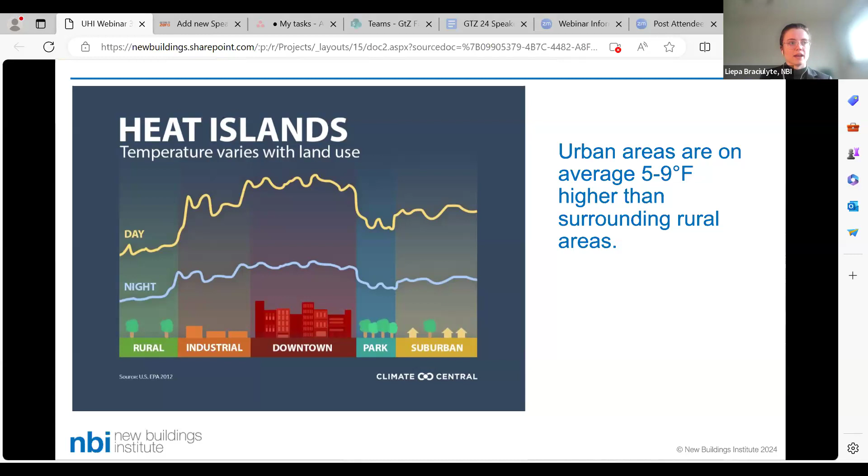As you may have heard from news coverage, 2023 was the hottest year on record, and 2024 is expected to surpass it. Heat brings along an increased risk of heat illness and heat stroke, and can even be fatal if adequate measures are not taken quickly.

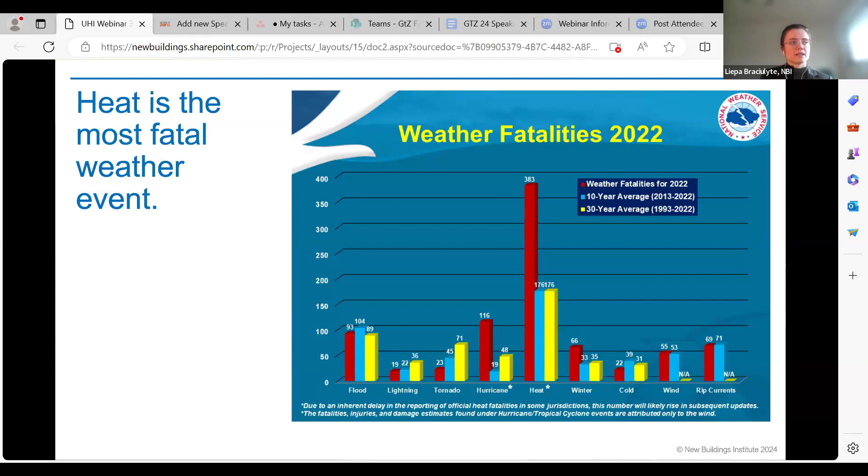In addition to causing heat illnesses, heat has many other impacts to health. For example, many common medications, such as for blood pressure and diabetes, reduce the body's ability to cool off. On the other hand, some medications are less effective at high temperatures. Also, high heat can increase mental health problems such as depression and anxiety, can reduce concentration, and has the potential to increase violence.

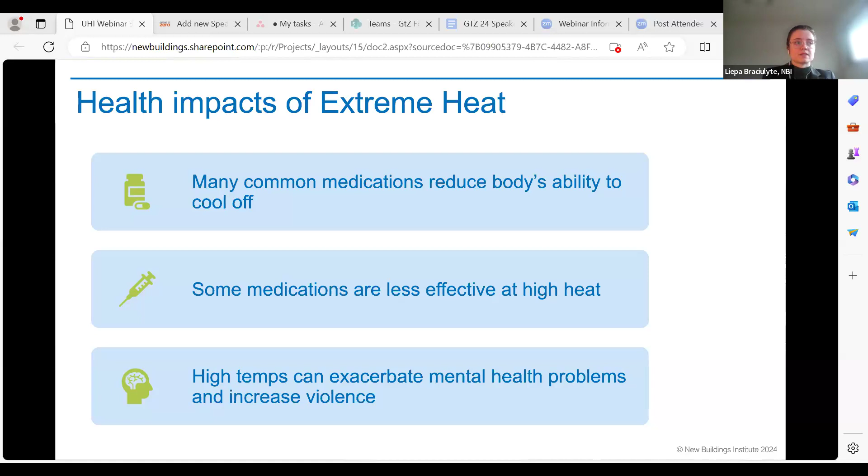Urban heat islands and extreme heat have many other wide-reaching impacts on communities outside of health. High temperatures increase the production of smog and air pollution. Extreme heat also increases energy consumption of cooling, increasing greenhouse gas emissions and utility bills for residents. Also, extremely high temperatures increase the wear and tear of buildings and pavements due to more extreme temperature fluctuation.

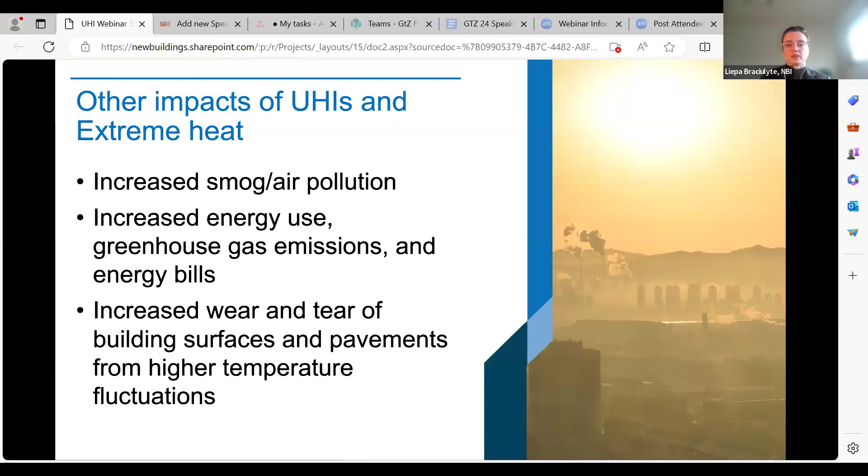In this webinar, we will discuss the following extreme heat and UHI mitigation strategies. These include cool roofs and green roofs, cool walls, cool and permeable pavements, shading, trees and vegetation, and a maximum indoor temperature set point, which is basically mandatory cooling. It's important to note that UHI and extreme heat mitigation are both climate adaptation and climate mitigation strategies, since they protect people from extreme heat while reducing the amount of heat being trapped in the atmosphere that exacerbates global warming.

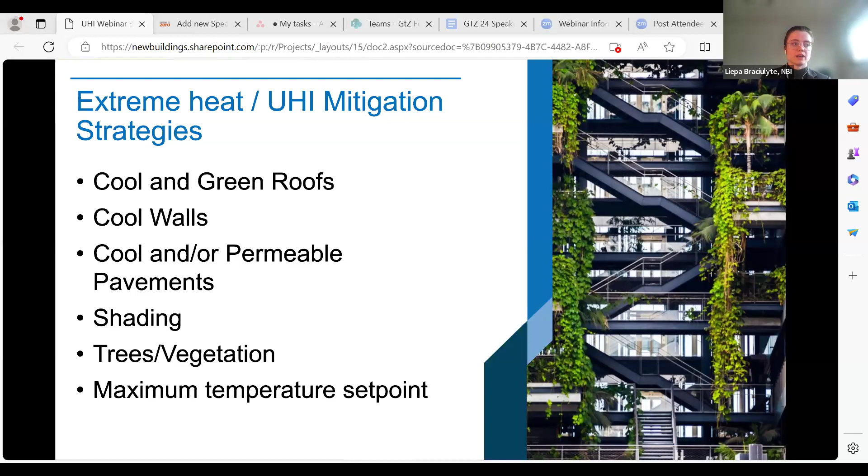Thanks, Liepa. Hi everyone, I'm Audrey. I'm the project manager with the Cool Roof Rating Council. Like Liepa said, I'm going to give an introduction about what cool roofs and cool exterior walls are, how they can help mitigate urban heat, and talk a little bit about the testing and evaluation, as well as availability of data related to these types of products.

So what exactly is a cool roof or a cool exterior wall? These are building exterior surfaces that highly reflect sunlight and emit absorbed heat. We measure how cool a surface is using two different radiative properties. The first of these is solar reflectance, or SR. Solar reflectance is the fraction of solar energy that is reflected by a surface, and thermal emittance is the relative ability of a material to re-radiate heat that is absorbed. Both of these properties are measured on a scale from 0 to 1, where 1 is 100% reflective or 100% emissive.

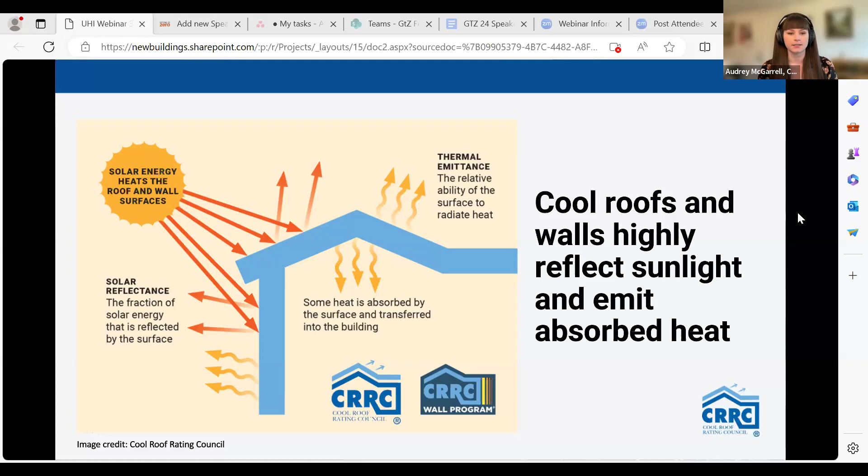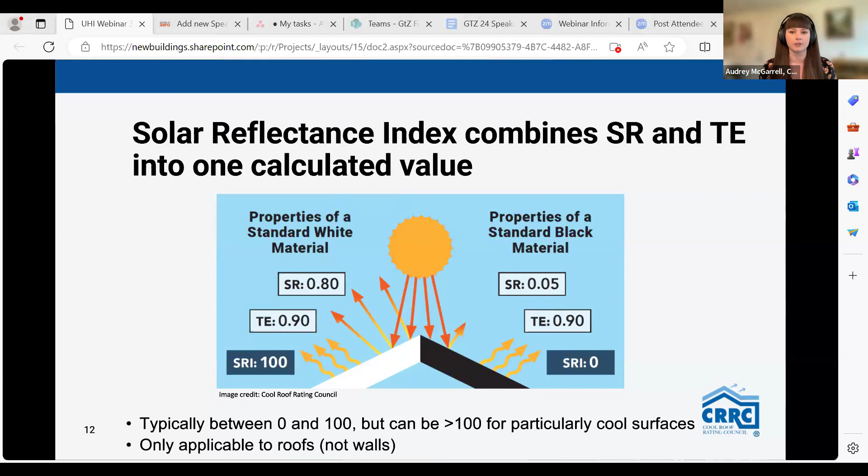Another term you may have heard of in relation to cool roofs is solar reflectance index, or SRI. This is actually a calculated value that combines the two measured properties of solar reflectance and thermal emittance into one number, typically on a scale from 0 to 100. 100 would be a cooler product. In some cases, you can actually have an SRI that exceeds 100 — that would generally be if the product has an exceptionally high solar reflectance. I do want to point out that SRI is commonly used for roofing materials, but it is not applicable for exterior wall materials. This is due to nuances with how SRI values are calculated and certain assumptions that go into that calculation.

So moving on to the impacts of cool roofs and cool exterior walls. I have this divided up by individual building impacts, and then we'll talk about impacts on entire communities, and finally looking at it from a global lens.

First of all, cool roofs and walls reduce the surface temperature of buildings and the resulting solar heat gain of the building. This can help reduce the cooling load of buildings that are air conditioned during hot weather, which in turn helps to decrease AC use and lower utility bills, and can also extend the life of HVAC equipment if it's being used less. In buildings that don't have air conditioning or have poor insulation, cool roofs and walls can also help increase occupant comfort and safety.

Like Liepa was talking about, heat can have very difficult impacts on people's health. And so in situations where AC isn't available, also like a power outage, cool roofs and walls can make a big difference. I do want to note that all of these impacts can vary depending on a lot of different characteristics of the building. Obviously, things like climate zone, time of year, energy use patterns, even how the materials are installed, can have an impact on the sort of magnitude of the impacts of cool roofs and walls.

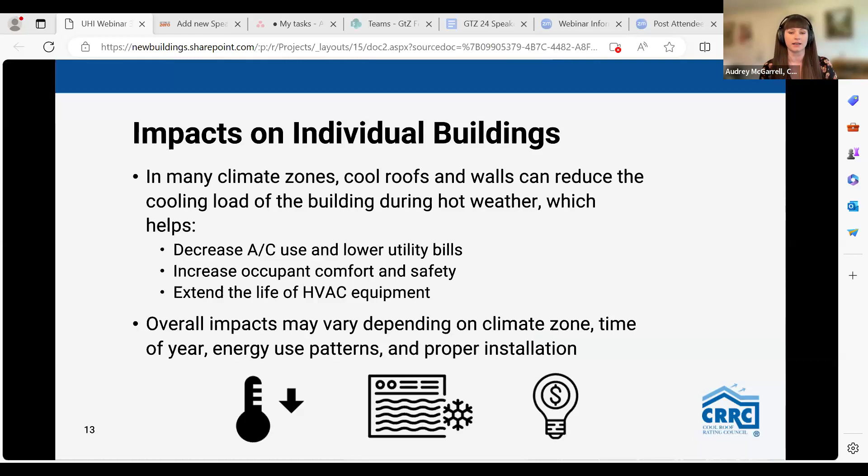Looking at the community level, the reductions in air conditioning use associated with cool roofs and walls can help improve grid stability, especially during peak times of day and peak seasons. It can also improve air quality by lowering outdoor temperatures, which can improve air circulation as well as decrease the production of ground level ozone. Reductions to the UHI effect and its associated public health risks from heat waves are also a benefit of cool exterior walls and cool roofs.

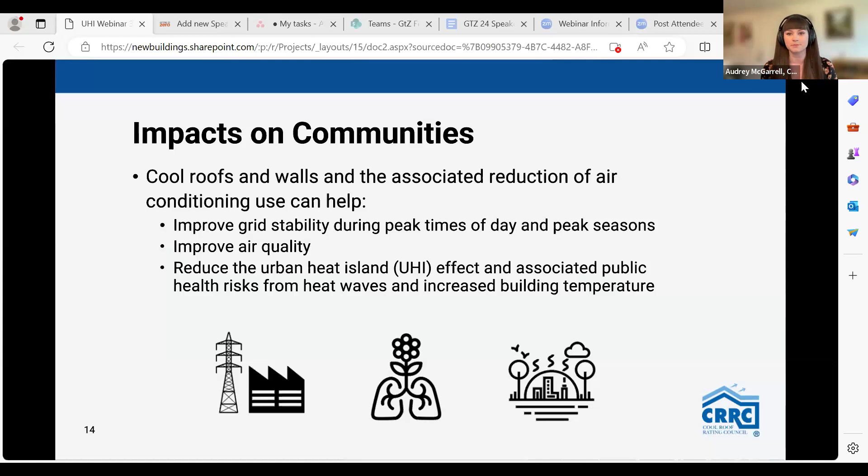Finally, looking at this from a global lens, installing cool roofs and cool exterior walls actually raises the global albedo, which can help reduce global warming. Furthermore, the reductions in AC use from using these surfaces can reduce the amount of CO2 and other greenhouse gas emissions associated with fossil fuel generated electricity for AC.

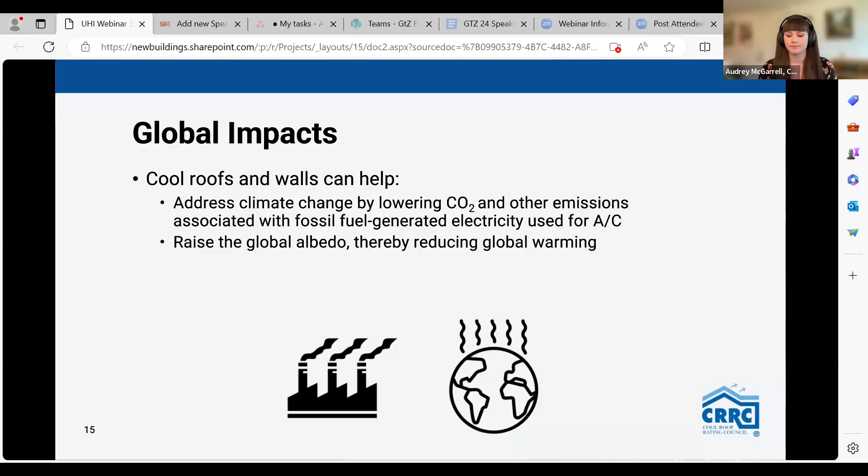Next slide. So now we're going to switch gears a little bit and talk about measuring and evaluating the radiative properties of exterior wall and roofing materials.

Both of these properties, solar reflectance and thermal emittance, can be measured in accordance with various ASTM standards and other industry vetted test methods at laboratories across the United States and abroad. The most common test method that's used for solar reflectance is ASTM C1549. This is obviously an ASTM standard that uses a portable solar reflectometer to perform measurements on specimens.

I do want to mention that while this test method is used for both roofing and wall products, there is a different setting that is required for wall products because of the nuances with how solar radiation is hitting vertical surfaces as compared to low and steep slope roofs.

I see a question in the chat. Please define ASTM. ASTM is a standards organization that develops and maintains standard test methods and specifications for different building products and all kinds of other products. So they're a global standards organization.

Moving on to thermal emittance, the most common test method that's used is referred to as the slide method. This is not an ASTM standard, but it's an industry vetted adaptation of ASTM standard C1371. This test method was developed in order to provide more accurate measurements of specimens that have low thermal conductivity. So basically, most roofing and exterior wall materials, aside from metal, tend to hold on to heat. They don't conduct it very well. And so that can affect the thermal emittance measurements. So this method is a way to get more accurate results for that type of material.

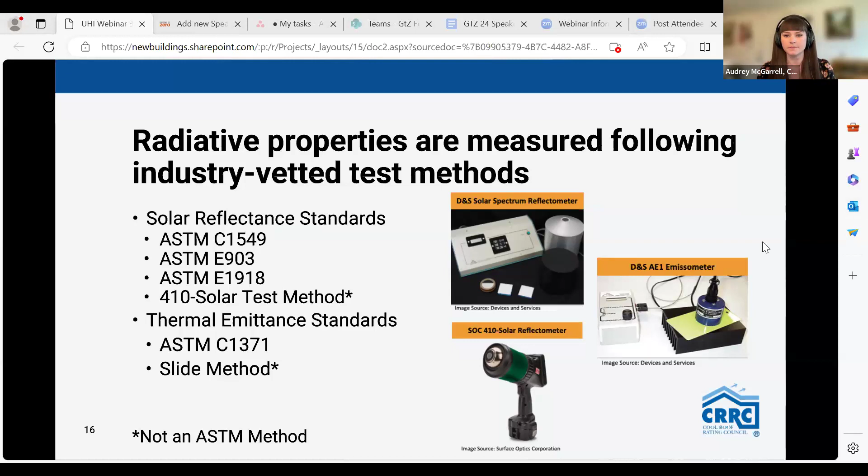Another really important part of evaluating a material's radiative properties is natural weathering. So the industry standard for natural weathering is 3 years, a period of 3 years of natural exposure. And for the CRRC's rating programs, which I'll discuss in a moment, we require specimens to be exposed in 3 different locations: Ohio, Arizona, and Florida.

Natural weathering and then following up with aged testing is a great way to sort of get an estimate of how a product will perform over time, since obviously once it's installed on a building, things like UV radiation, soiling, etc., will have an impact on the radiative properties. Next slide.

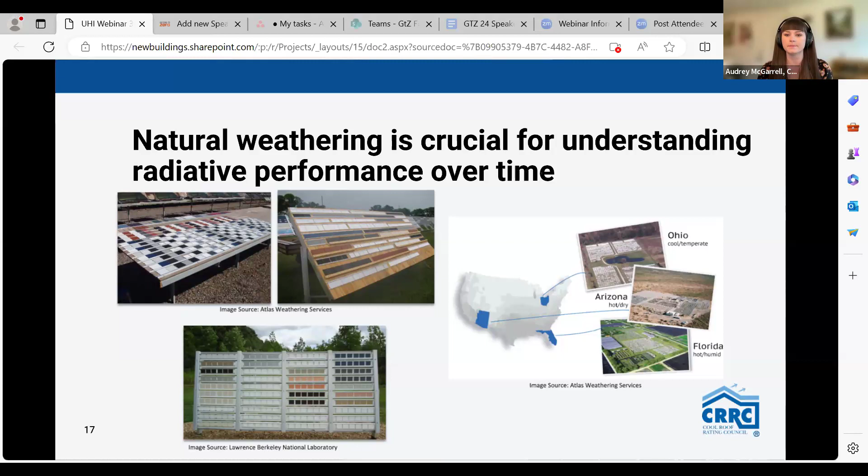Something else available for roofing products only is laboratory aging to provide simulated aged values. This is important because certain building codes require an aged solar reflectance value when installing a roof. So if a product has just recently been tested, this is a way to get that aged value and work towards code compliance without waiting for 3 years. When aged values become available, they replace the laboratory aged values.

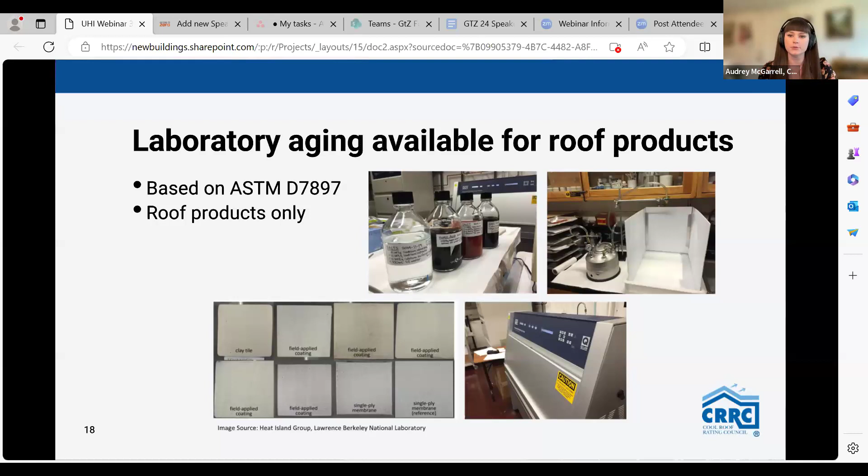One common question is whether cool roofs and walls are only white. While white roofs are one very common and easy way to achieve a high solar reflectance, they're not the only option. There are many roofing and exterior wall products available using materials that reflect infrared radiation while maintaining a darker visible color. A few common examples would be factory-coated metal roofs and siding, asphalt shingles made with infrared reflective granules, and a variety of paints and coatings for both roofs and walls that utilize this type of technology.

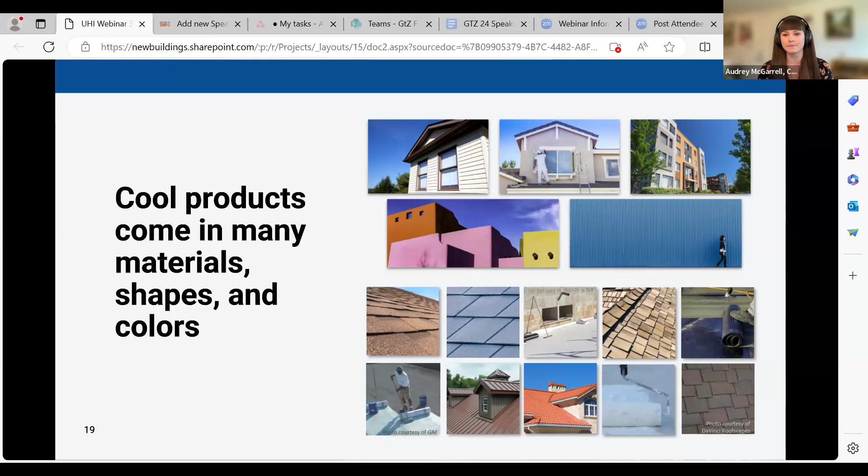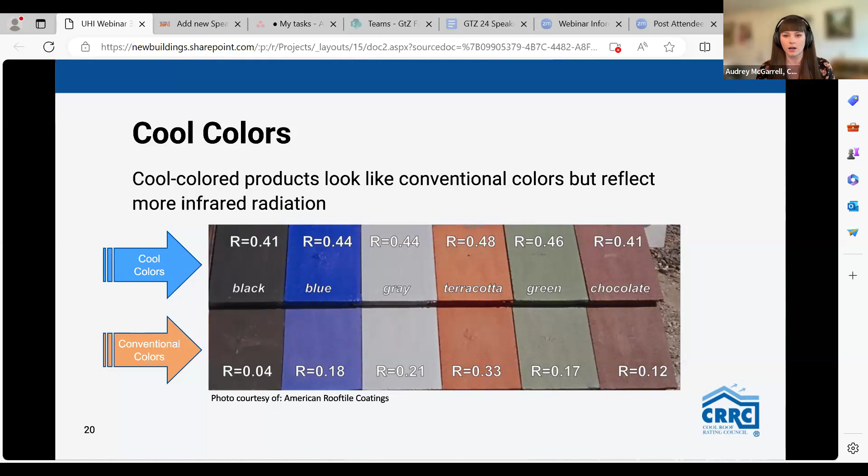Moving on, I want to briefly mention the existence of the CRRC's rated products directories. These are available online and offer free, publicly available roofing and exterior wall product solar reflectance and thermal emittance ratings. Our ratings include both the initial values, measured when the product is brand new, and the aged values, which occur after 3 years of weathering. The data are obtained following industry vetted test methods and by independent accredited laboratories.

This provides assurance that the data are credible, unbiased, and the specimens are managed under a strict chain of custody. All of this testing is done in accordance with our proprietary program manuals, and for our roof program, in accordance with the ANSI/CRRC S100 standard. That is an American national standard maintained by the CRRC, and it's actually referenced in a lot of codes, programs, and standards that promote the use of cool roofs.

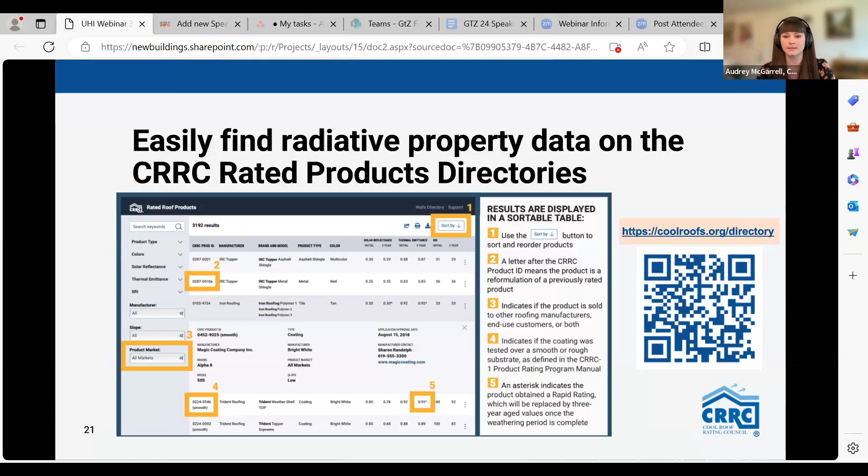So finally, to tie this into today's topic, third-party ratings have an important role in policy and program development, compliance, and enforcement. They provide assurance that data are accurate, and they help bolster claims made by manufacturers or people selling cool roofing and wall materials. They also help support the development of policies and programs by providing a repository of data to reference, to see if a policymaker evaluating policy options can find products out there on the market that can be used to comply. That does it for my portion, and I will turn it over to Chamonix to talk about installation.

Great. Are we ready to go? I think there was an attempt to change the slides.

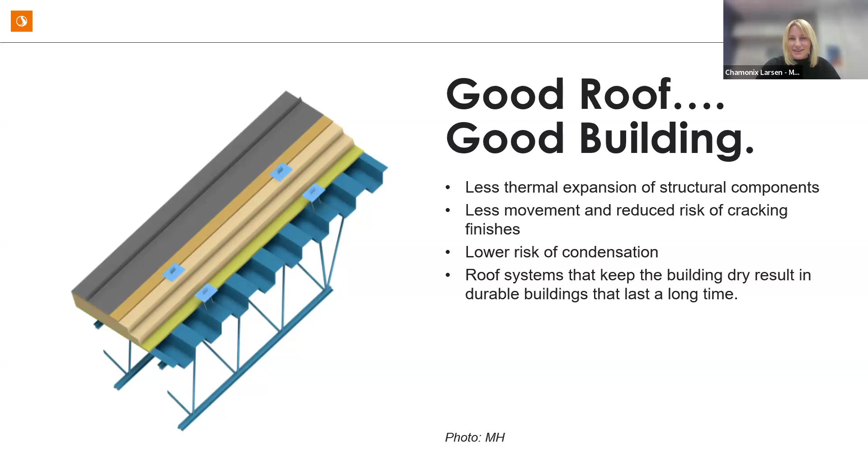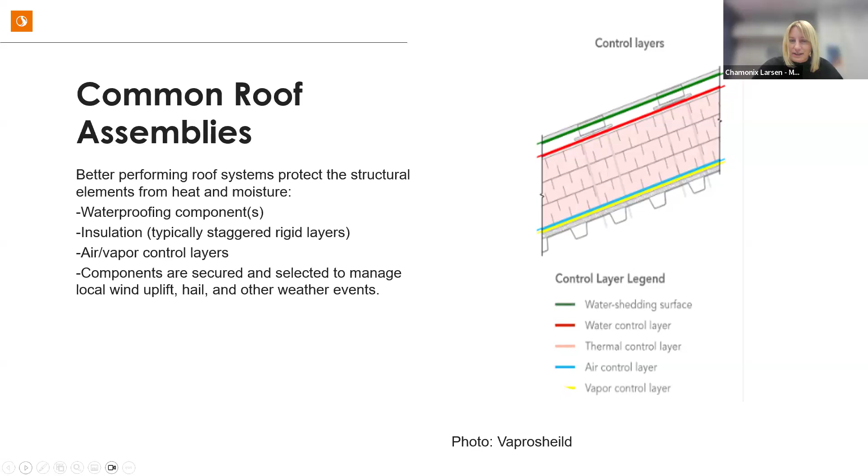Common roof assemblies vary, and in 10 minutes we can't really cover all of the types of roof assemblies on the market. There are probably thousands of different UL rated assemblies out there, and they all have different types of performance depending on where you're building. But a lot of them have the same basic components: a waterproofing component, an insulation component, some layer that controls air and vapor as well as water, and methods that they're secured in order to meet demands for wind uplift and other forces present in whatever climate you're working in. So the roof is a system, an assembly, not just one component, and it has a specific layering that helps it perform when put together properly.

So best practices for roofs in general are to slope them—let's get the water off the roof. One of the primary functions of a roof is to keep moisture, rain, snow, and ice from entering the building. They're often multi-layered for added durability. You see a lot of built-up roofs where you're adding layers together to create waterproofing and those performance aspects.

They can also be protected roof membranes, where the actual performance layer is located below things like solar panels or pavers. These need to be designed to reduce wear and tear. So if you're going to add a solar array or some kind of planted medium on top of an existing or new roof, you want to understand how those things will weather together, and make sure they're all designed to be together for a very long time.

We want roofs to last over 20 years. Typically that's a minimum amount of time you want a roof to last, but we often design roofs that last a lot longer, in place for up to 50 to 70 years sometimes. So the idea that they can be maintainable and durable over a long period of time is really important.

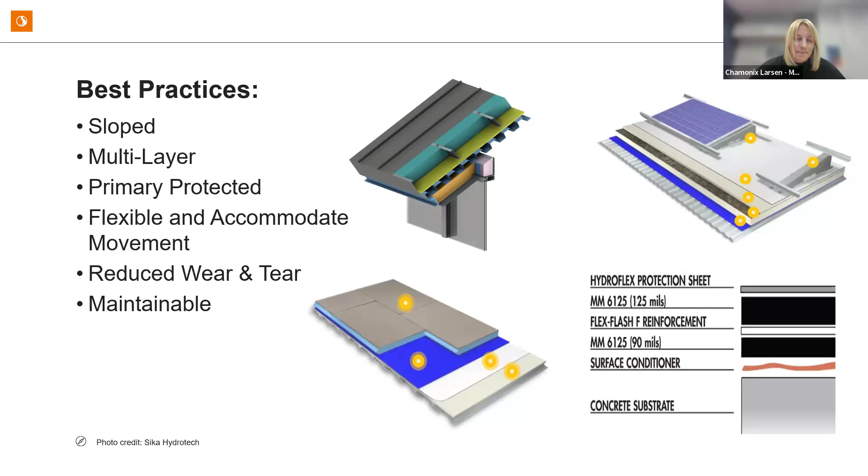Urban heat island and roof systems is again part of designing to achieve a solar reflective index, which is a code compliant requirement. The range is typically between 0 and 100 for most roof products on the market. It also applies to LEED sustainable sites, and relates to the membranes, metal components, finished materials, and rooftop amenities such as pavers and pools.

All those things factor into how your roof will actually perform when you think about its impact on urban heat island. There are also plants and planted roofs that help reduce your impact on urban heat island, and also help you meet code and develop methods for compliance. In the photo, you can see an ETFE roof—basically a pillow of membranes together that supports these big long spans.

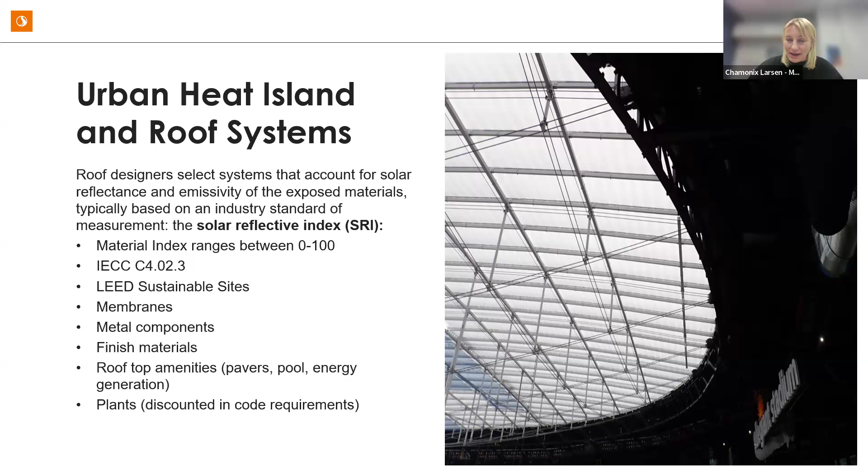Depending on your project, maybe you have a really traditional roof over something, or maybe you're trying to span a very big opening, like this stadium. You can achieve very lightweight, light colored roof membranes across multiple different types of membranes in your portfolio of buildings, and reduce your impact on urban heat island.

So roof selection and your solar reflective index should consider a couple of different things. Obviously, emissivity and solar reflectance are important, but you also want to know how much your building is going to be exposed—are you in the shade or the sun? Are you on a mountain slope facing north where you won't get a lot of sun? And what is the climate you're working in? All those things start to impact what kind of roof system you actually need to perform.

Those climates have a lot to do with whether you're in a heating dominated climate or a cooling dominated climate, and how much you're trying to mitigate the urban heat island that's possible on your site.

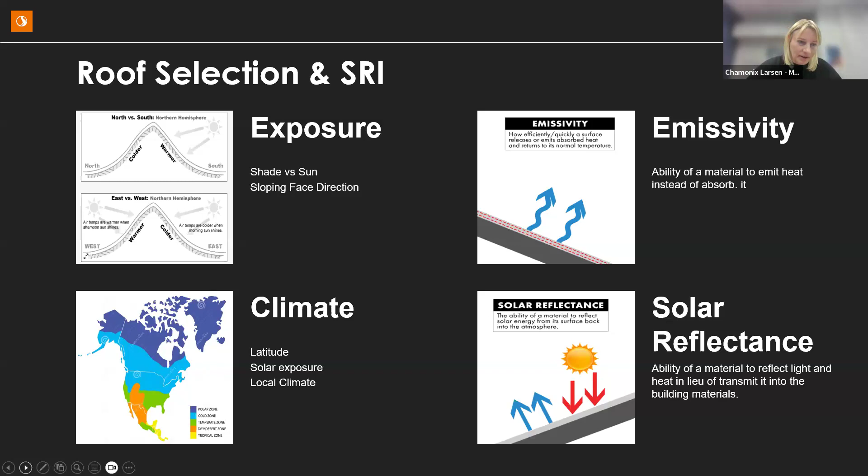So cool roof design approaches. One is obviously to select a product that has that reflectivity that mitigates it. Another one might be a planted roof or some kind of protected membrane roof. Those are two of the most common strategies.

A high SRI material may not always be required by code, so it's worth understanding when it's required and why it might be required, so you can design appropriately.

A shaded roof area, say you have a roof that's never going to be in the sun at those times, you might consider, is that the appropriate solution to my design problem? Am I going to put it below photovoltaics or some kind of thermal hot water system? Is it a greenhouse and I need to grow food? Obviously, a greenhouse isn't going to have a higher SRI material potentially.

Or is it a cold climate? And I put a question mark there because sometimes in cold climates you still want a high SRI material. But if you're trying to heat a building, there may be some cases where a darker roof color can help warm that building. Those are usually pretty extremely cold climates where that may make sense. It still may have an impact on urban heat island, and you still may want to reduce that in general.

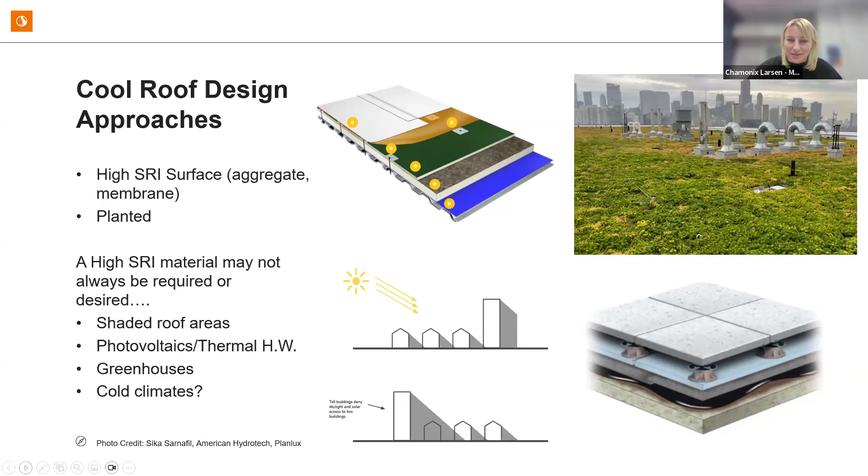Next slide. So roof color selection matters.

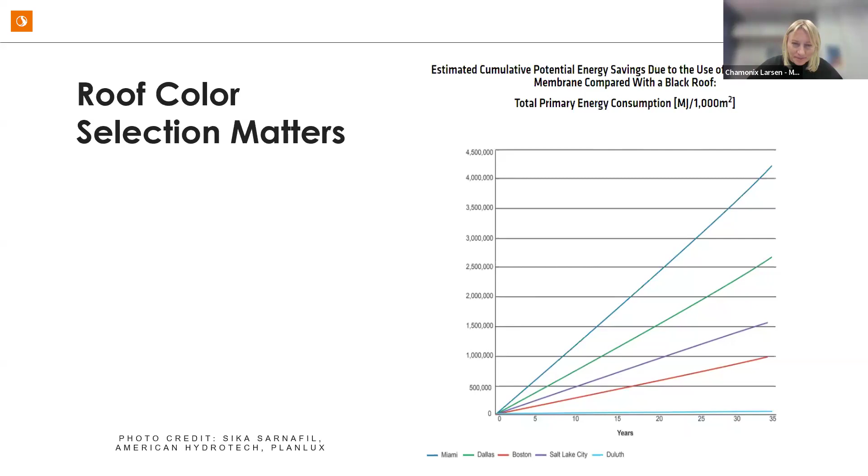So again, the SRI might be something that you pick based on the solar reflective index. It ranges between 0 and 100. It can be a membrane, and it can also be other components or finished materials. Rooftop amenities or plants may also be a part of that.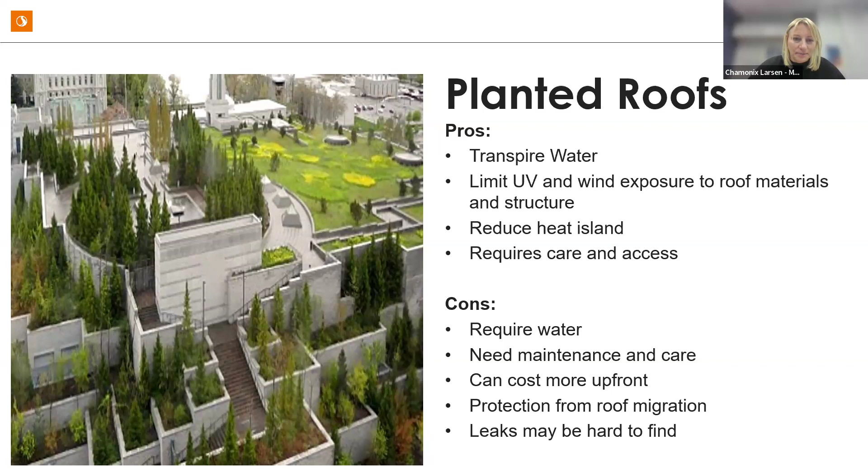The cons, you may be considering, is my climate appropriate for this? If you're in a desert climate, you're going to be adding water to your building, actually putting water on top of your building. These places need maintenance and care. They can also obviously cost more upfront. Your roof membrane needs to be protected. So if you have roots growing through your roof assembly, you need to make sure there is a root barrier, some kind of place where you limit the ability of the root to move through the building materials that you don't want it to move through. And then leaks may be hard to find. If you have a system like this, it's very much covered up. You may not be able to find some of those leaks after the fact if water's moving laterally in your roof assembly. Next slide.

Plant selection is also a really important part of a green roof. You want to make sure you understand the climate you're working in, in terms of hardiness zone, rainfall, and wind. You want to understand your site: how much sun and shade will it get, what kind of biodiversity do you want to create, what size of vegetation, and the visibility as well.

Maintenance is also a huge consideration with planted roofs. Do you want to do year-round maintenance? Do you want to allow whatever the wind brings to the roof to settle and grow there, or are you going to do a lot of weeding and care to try to maintain a certain set of vegetation that you're looking for?

Access is also important. If you have a roof that needs maintenance, you need to make sure access is safe and that there are options to access the roof. The picture in the lower corner is a roof deck with public access, which makes it easy, but not all roofs have that, so maintenance access needs to be considered as well.

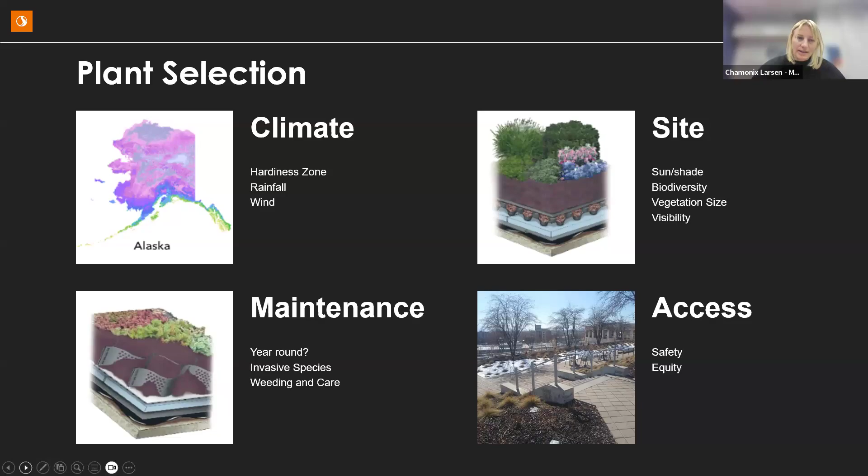Another part of roof assemblies is controlling things that impact the performance or quality of the building underneath, and air leakage is a big part of that. Most roof assemblies need some level of air control. When we don't control air, we get problems.

The picture on the left shows an air leakage test. We have ways to determine where air leakage is happening at roof assemblies and how much. The pictures on the right show what happens when we allow a lot of air to move through roof systems into a parapet condition in a colder climate, where humidity can land on surfaces and result in risk of condensation.

Controlling air and understanding how it moves through your roof is an important consideration for getting a high quality roof. This happens at all transitions of the building: parapets, penetrations, skylights, drains, any kind of connection point structurally, like for a solar array or a landscaping wall, has the potential to promote air leakage and these risks.

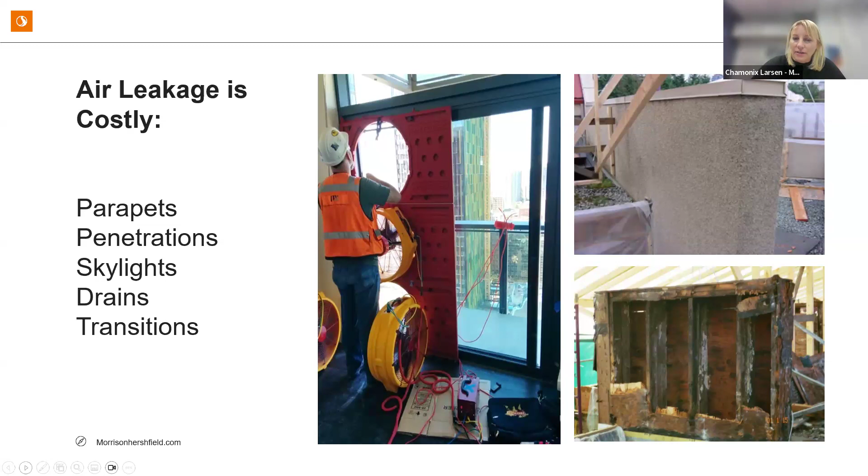Another point I want to make is that in design of roofs, we need to address thermal bridging. I'm just touching on this, but there are definitely ways we can design planted walls and green roof walls to have a significant impact on the energy use of the building if done properly.

The slides on the left show a roof assembly with a parapet wall that extends through the insulation layer, and the diagram below shows thermal imaging and modeling of that design approach. The images on the right show another solution where the insulation runs below that wall, and how much that mitigates the thermal heat flow through the assembly.

Some of the amenities and features that make us really like planted roofs and roof amenities can also have a significant impact on the energy use of the building, so designing to mitigate those impacts when significant is important.

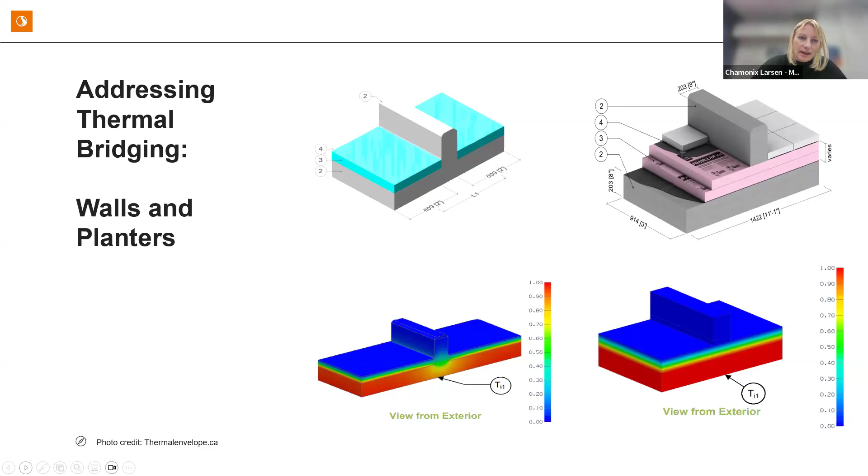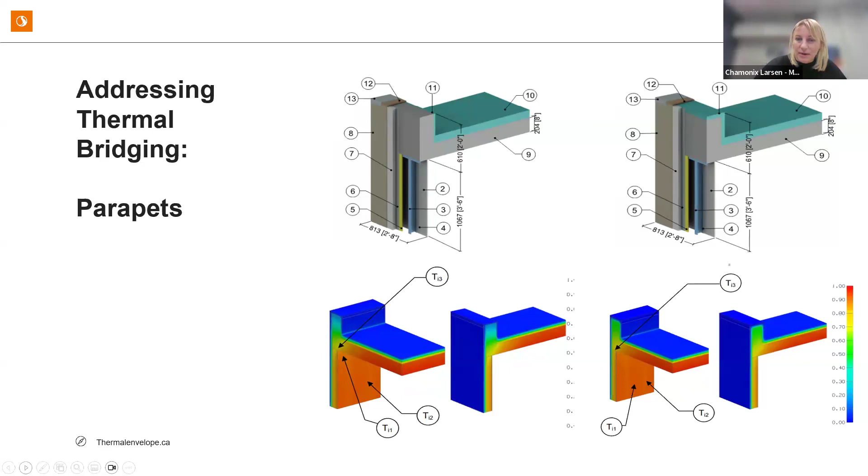Reiterating this a bit more, parapets also have this potential, and really any detail does, but you can see how an uninsulated parapet detail has the potential to move quite a bit of energy through it. Whereas if the insulation is brought up and over all these penetrations and is continuous, it can have a significant impact on keeping heat in and cold out, or vice versa depending on your climate, maintaining building comfort by looking at those roof details more closely.

That's it for my portion. Thank you.

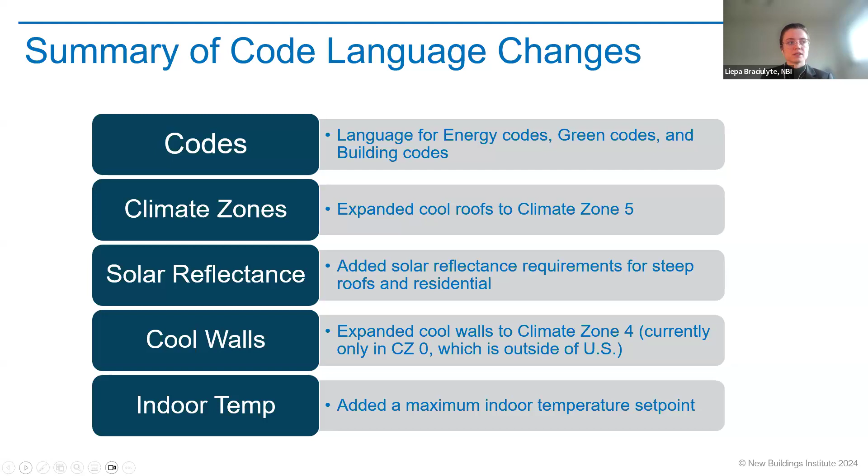Jurisdictions can modify this code overlay language in the report and use it for any other policies such as zoning code ordinances, incentive programs, housing codes, and so on.

The UHI and Extreme Heat Code Overlay report includes code language for 6 different codes and standards. The first type of code is the Energy Code, which includes ASHRAE 90.1 and the IECC, or International Energy Conservation Code. ASHRAE 90.1 is for commercial buildings and multifamily buildings 4 stories and taller, while the IECC includes requirements for both commercial and residential buildings. Both are energy codes, and their goal is to make buildings more efficient. In the code overlay report, we included language for both cool roofs and cool walls in the energy codes.

The second type of code included in the report is the Green Code, which is ASHRAE 189.1, also known as IGCC. The goal of this code is to reduce the environmental impact of buildings, and it includes requirements for cool roofs, cool walls, cool and permeable pavement, and tree shading requirements.

Lastly, the third type of code in the report are building codes, which aim to protect the safety and welfare of the building occupants and the public. Codes in this category include the International Building Code, International Residential Code, and the Mechanical Code. We included the cool roof and cool wall language in the IBC and IRC, and in all three codes we incorporated a maximum temperature set point.

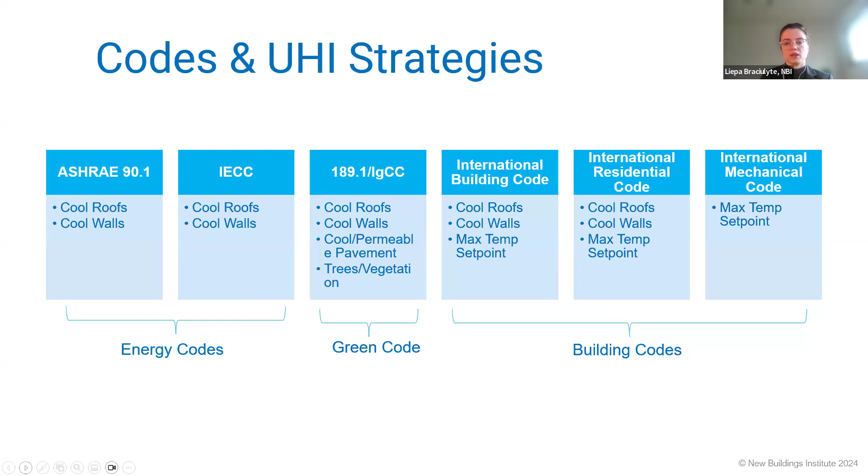We included all these code options because different jurisdictions have different priorities. Some really prioritize their energy code, while others work primarily from their building code or their green code.

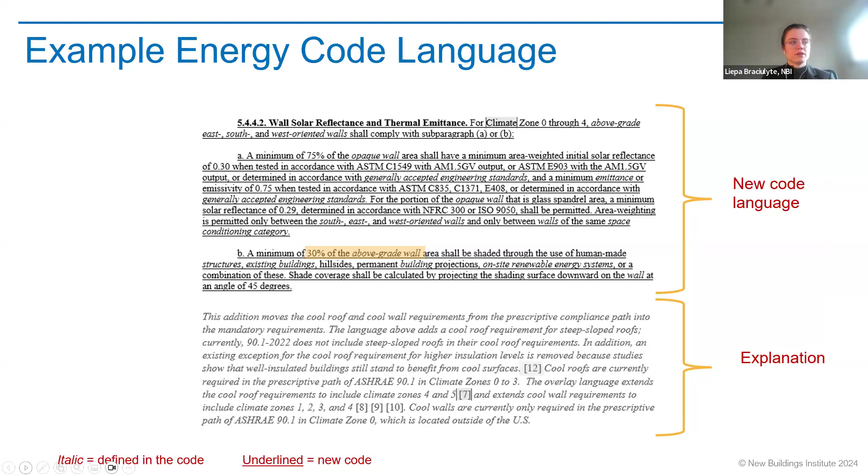The language in the code overlay can be modified to best suit a jurisdiction's goals and needs, and it can be used to create policies other than the energy code.

Before a local jurisdiction can decide which extreme heat or UHI mitigation strategy they will implement and the policy pathway they will take, jurisdictional staff need to verify the rights that the state has given to the jurisdictions and what they're allowed to legislate. For example, some states don't allow their cities to create local energy codes that are more stringent than the state code. In such situations, jurisdictions can implement policies via the zoning code or other strategies.

For example, suppose the jurisdiction does not have the power to require cool roofs and walls or any other mitigation strategy. In that case, they can create a performance approach for UHI mitigation that requires buildings to choose a combination of different strategies, but the jurisdiction is not requiring every building to have cool roofs, for example. They can choose whether they want to incorporate shading, trees, cool roofs, cool walls, cool pavement, but there's not one thing that each building needs to incorporate.

There are many different types of policy pathways that a jurisdiction can use to implement extreme heat mitigation, including zoning code, housing code, energy code, building code, incentive programs, and others.

Zoning codes implement the goals and objectives of a comprehensive plan of a city. They generally dictate function for an area, building height and bulk, population density, and parking requirements, as an example.

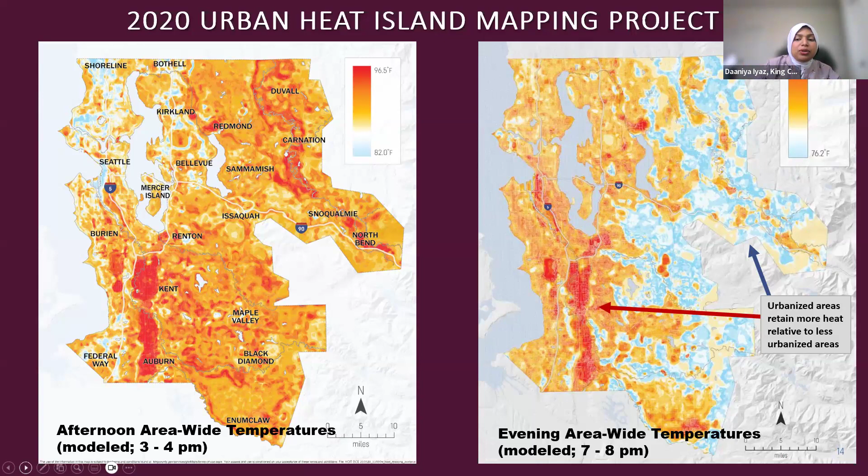Looking at this heat island effect, we're noticing that at the evening map, there really isn't as much nighttime reprieve from hot temperatures, which can be dangerous for health conditions. We're seeing up to a 20 degree difference between the surface temperatures in those really hot areas in South King County and the more rural, cooler areas.

One more thing to note is that these indoor temperatures can sometimes exceed the outdoor temperatures, and they're the ones that are most dangerous for health conditions.

We especially saw this during the 2021 Pacific Northwest heat dome, which I'm sure many of you heard about, where we saw over 30 deaths directly attributable to extreme heat in King County, which is extremely abnormal for our region.

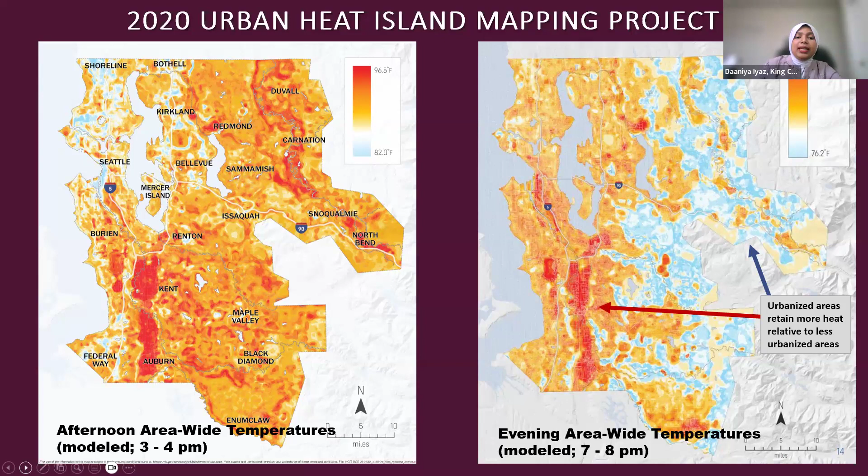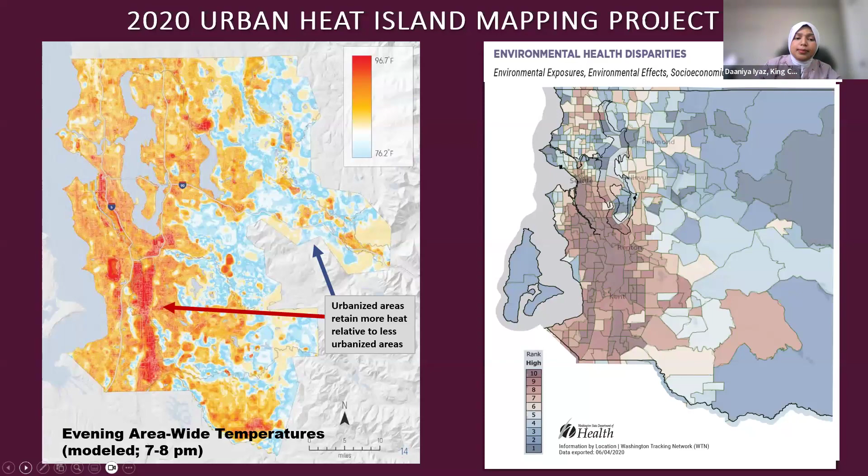So the people most impacted by extreme heat are some of the most sensitive and vulnerable to it. All of this, along with the 2021 heat dome, formed the impetus for why we wanted to create the first ever county-wide extreme heat mitigation strategy.

It's a priority action in King County's already existing strategic climate action plan, under climate preparedness and community health, and it's also supported by a FEMA grant as well as additional King County funding. But in terms of our audience, it's not just for King County government. We recognize that as a county of about 2.3 million people, we're a community of communities, each having their own needs, challenges, and burdens when it comes to extreme heat.

So we are co-developing the strategy with local jurisdiction staff, as well as community organizations and partners, to really come up with a portfolio of solutions for what we can collectively do to mitigate extreme heat.

We recognize that this is not really a one-size-fits-all situation. So the focus is going to be on a mixture of short-term actions that have to do with, for example, emergency management coordination, multilingual public health messaging, as well as really getting at some of the systemic factors that affect how people experience extreme heat, such as urban tree canopy management and building codes, and how we design neighborhoods and communities.

The completion date is summer 2024 — that's when we'll be releasing the strategy this year. Right now we're working on really ironing out and refining the actions and drafting them.

I wanted to quickly share our draft goal statement, just so you understand what our overall goal is with the strategy and what strategic priorities are driving our work. Our goal overall is to reduce the harmful impacts of extreme heat on people as well as the environment in King County, with three different strategic priorities.

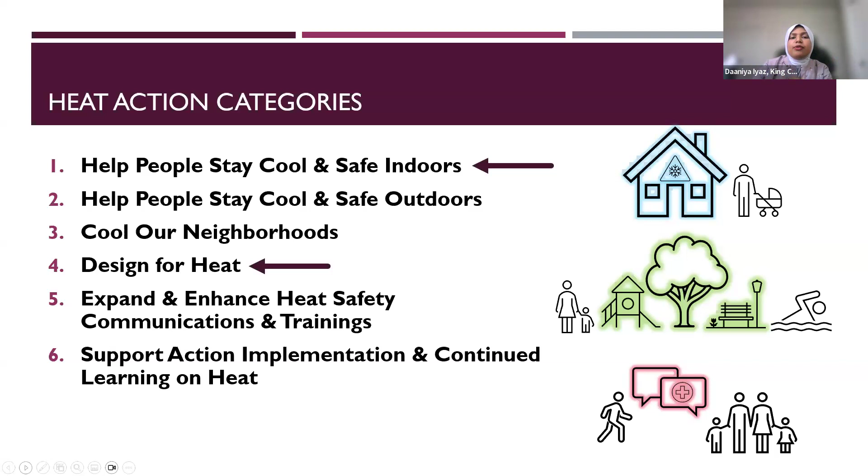So I wanted to start with design for heat because it's the most relevant to this talk. The most relevant action we'll be focusing on here is developing and supporting local adoption of a King County building code package that focuses on heat mitigation. We want to draft model codes and then support local jurisdiction adoption of these model codes. We're still figuring out what is going to go into this building code package.

A lot of our conversations have been inspired by the amazing work that NBI has done with their heat code overlay. One idea we've talked about is increasing the use of high albedo materials in new construction and major retrofits. When we're looking at roofs and increased shade coverage, we're figuring out how we can recommend this—whether to attach it to zoning code requirements or to incentives for local jurisdictions—to motivate adoption for our local cities.

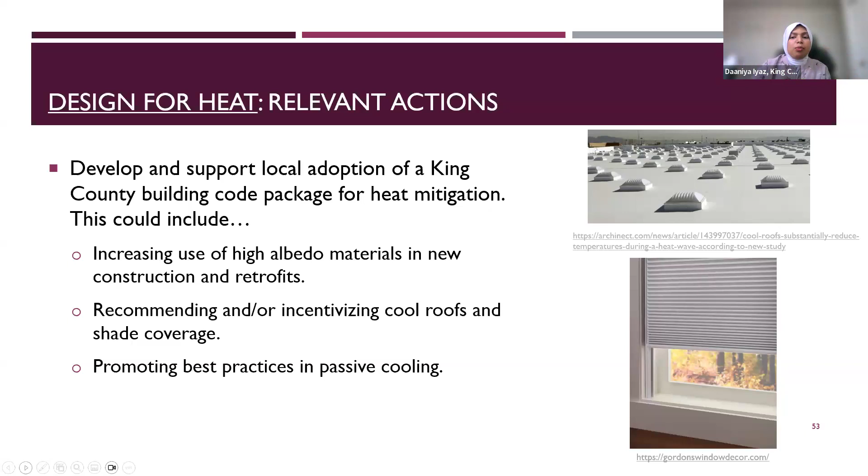The last one is promoting best practices in passive cooling. For example, when we're looking at external operable shading and insulated shades, how exactly can we promote these best practices? Is there a way we can have an outreach program with property managers or residents to underscore the importance of passive cooling measures and updating buildings like multifamily to have more of these amenities and features?

The next category is helping people stay cool and safe indoors. I wanted to briefly touch on these actions because they focus on increasing the energy efficiency of residences, as well as reducing financial barriers to active cooling.

The first category we're looking at is increasing access to home cooling for low-income residents and other vulnerable populations that live in those mapped heat islands you saw earlier. The idea is that we can distribute passive cooling techniques such as window films or reflective window films that could help reduce solar gain.

We also wanted to focus on expanding heat pump installation programs, since that also supports our greenhouse gas reduction targets as a county. There is currently a pilot underway to install more heat pumps in low and moderate income homes in unincorporated King County, and that's something we want to support expanding.

The next action is to expand access to energy efficient repairs, specifically weatherization programs, as well as utility bill assistance, to ensure that even if people do need to get portable ACs, for example, they're able to afford these things.

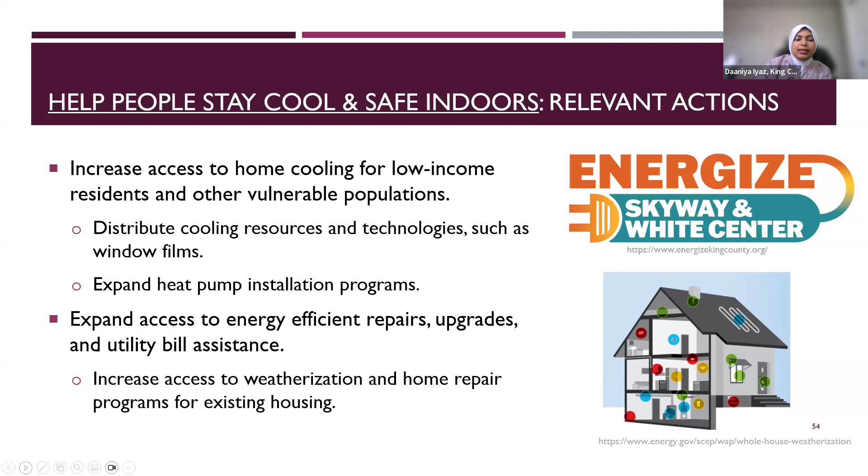What I wanted to do real quick is just ground it back to community and talk about what we've heard from our community members and why we're doing this work. We've had multiple community outreach events, all focused on areas where we see extreme environmental health disparities as well as mapped heat islands.

When we asked them what are some of their major barriers to cooling at home, they mentioned cost as the top one—either purchasing air conditioning, purchasing cooling technologies, or paying their bills. The second barrier was difficulty and confusion with cooling options, especially for communities with limited English proficiency.

People cited health concerns, specifically around mobility, and also the concern of power outages—if they get an AC, what if it overloads their electrical system in their building? But overall, we did hear really strong interest from community organizations in increasing the cooling capacity of homes and buildings.

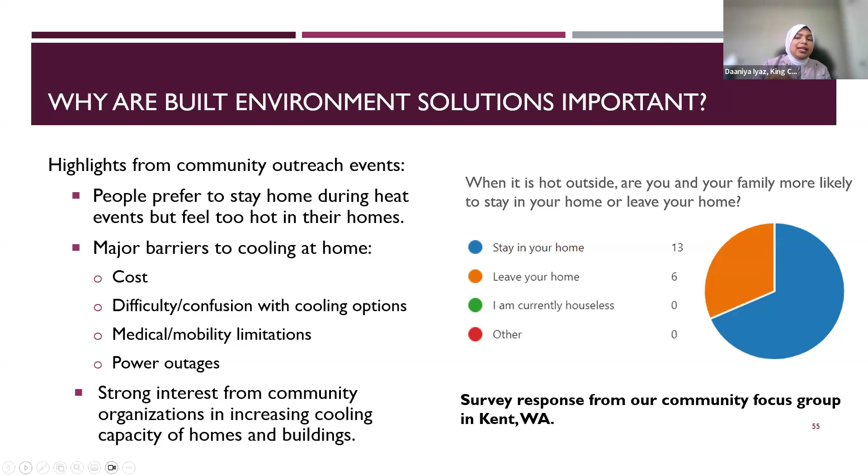So just to wrap up, I wanted to share some key takeaways, which will be on the next slide.

But overall, we heard from folks that people would really prefer to stay at home during heat events. And that just really underscores the importance that we need to ensure we're taking extreme heat into account when we're looking at building materials and how we design communities and neighborhoods.

Since, like Audrey and Liepa mentioned, higher albedo surfaces can reduce the solar load. And that can also address the issue of cost that people are mentioning, where they'll have to spend less money on, for example, operating cooling technology like ACs.

And the last key takeaway I wanted to talk about is that we need a mixture of solutions that look at code amendments, passive and active cooling retrofits, and make sure it integrates with already existing systems.

And finally, we want to ensure that we're also communicating all of this. So are we doing outreach in multiple languages? Are we reaching the community members that need it the most? Because all this work that we're doing in the built environment is climate work that can make a difference and can save lives.

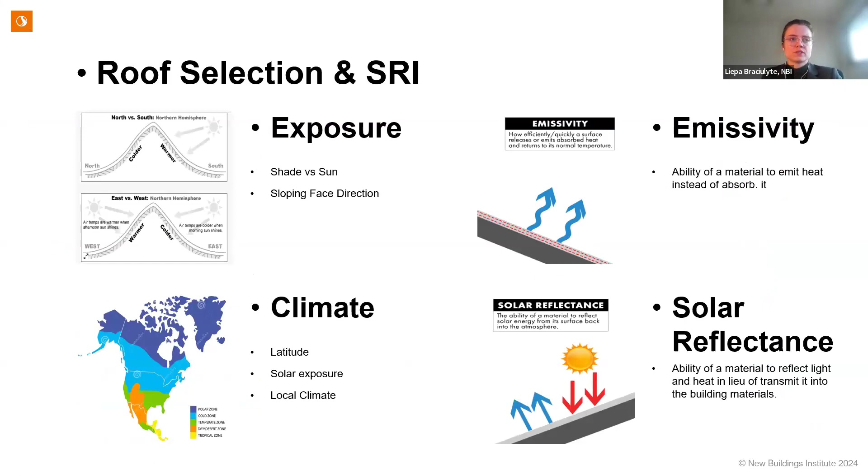One of them was, could you talk a bit about the compatibility and benefit trade-offs of combining cool roofs with PV solar installations? And the other one, do reflective cool roofs and green roofs have similar benefits to rooftop PV?

Does anyone want to take on that question? I can try to answer it. I'm not an expert on durability of solar PV, but I do know that they have a tendency to overheat, and that can be impacted by the materials around them. I think there is some level of impact of combining the two there.

I do know that sometimes in solar hot water conditions, you're trying to create reflectivity around the solar collection tubes for a solar hot water array. So I really think it might be done on a case-by-case basis to understand that. But in general, I think when electrical things get hot, they don't work as well. So in general, I think having a reduction of urban heat around solar arrays is going to be beneficial for the long-term durability of the panels.

Great, thank you. And there's another question from Sasha. Does the energy cost over time slide reflect climate change and shift to hotter and longer summers?

I'm assuming that's from Chamonix's presentation. I'm sure it doesn't. That came from a manufacturer, but it's to be taken with a grain of salt when it's on a manufacturer's website. I recommend, most of the design information we have, unfortunately, is based on historical data. All of the heating degree day information that we use to decide the loading on buildings is historical.